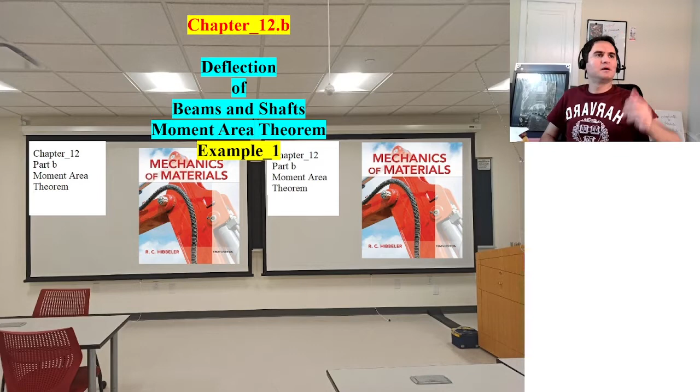Chapter 12, Part B: Deflection of beams and shafts based on moment area theorem. Example 1. In this example, we are going to solve the maximum deflection and also the theta at the free end.

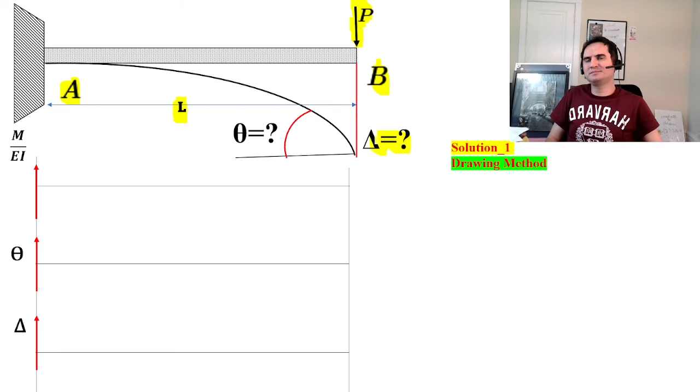So that's a cantilever beam AB with the length of L, handling a concentrated load of P at the free end. So we want to know what is the maximum deflection at B and what is the theta at B at the free end, because at A it is fixed, there is no delta, there is no theta.

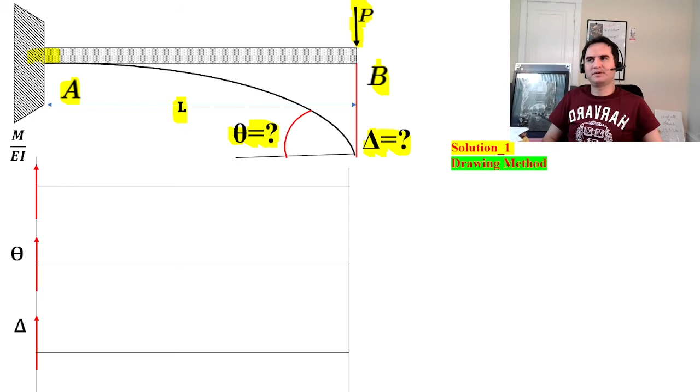So solution one, a drawing method. So if we draw the shear, moment, and M over EI, the area under M over EI is theta. If you remember, integration of M over EI is theta, and the area under theta is the delta. So let's see how that goes.

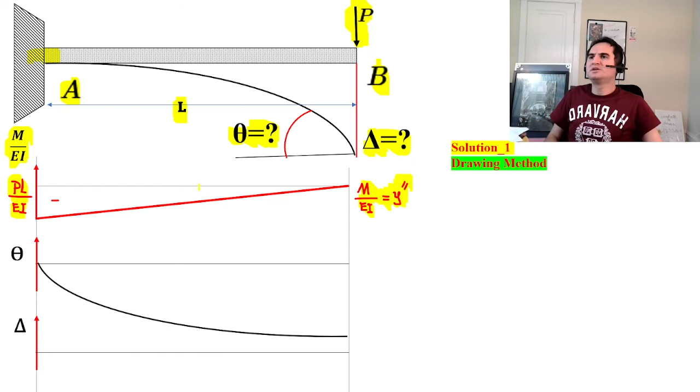So if this is our force, the moment area under M over EI would be y second, and that's PL over EI, because the moment created here is PL, divided by EI is PL over EI. And then from M over EI, if you calculate the area under M over EI, you will get the theta. So that's a second degree.

This is linear. So theta goes one degree higher than moment. So that's a second degree. And the area under M over EI, the area under this triangle, just gives us a numeric value for the theta. So that's nothing but PL over EI times L times 1 over 2 because of the triangle. So that's PL squared over 2EI. And that's Y prime or theta.

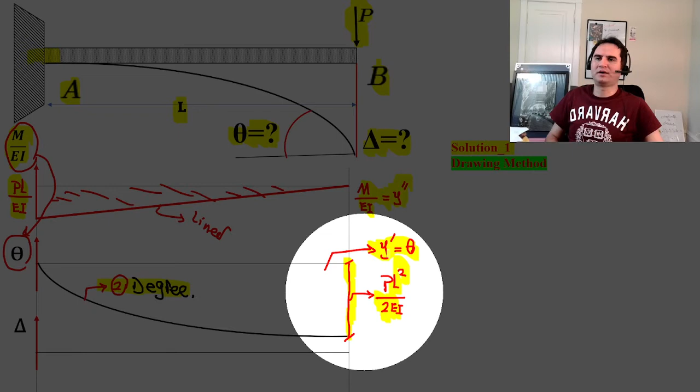And then if you go a step farther, this is second degree, delta goes one degree higher, and that's a third degree. And the area under theta is the amount of delta maximum at B. And if you remember, if we have a parabolic spandrel like this of second degree, that's 1/3 the area, B times H. So the rest of the area is 2/3 of BH.

And B is the length of the beam, and H is PL squared over 2EI. So that's 2/3 of L times PL squared over 2EI, and that's PL cubed. Yep. That's 2/3 of PL squared over 2EI times the length. So that's PL cubed over 3EI. So one can say the maximum deflection is PL cubed over 3EI, and theta is PL squared over 2EI.

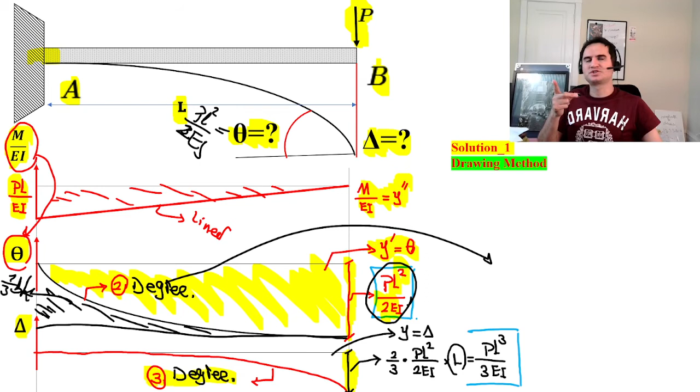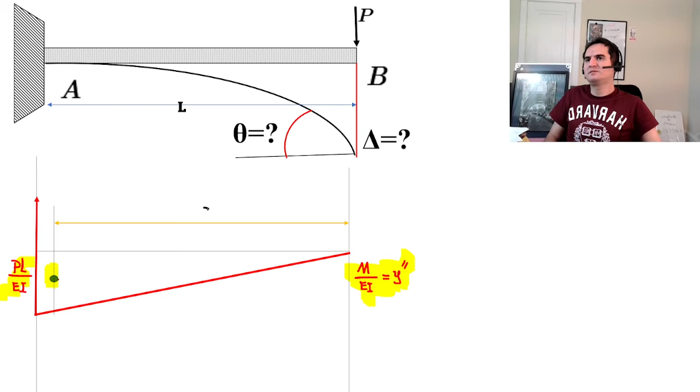Let's solve it with a different method. So that was from drawing shear and moment. We start from the moment, then draw the shear and go to theta and delta. At the same time, you can solve it by just drawing the moment and M over EI, and this time find the centroid. And again, if that's the centroid, that's 1/3 of L, and this is 2/3 of L.

Solution 2 is based on the moment area method. So one can easily say this is T of B with respect to A, the tangent of B with respect to A. If you draw a tangent from A, it gives you the tangent deviation of B with respect to A, and that's the area under moment about the vertical line of B. So that's the area times the centroid distance, 2/3 of L.

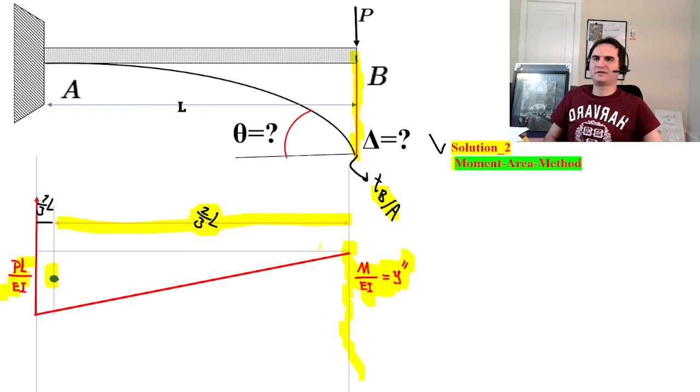So the tangent deviation of B with respect to A, if you draw a tangent from A which intercepts a vertical line from B, simply gives you the maximum deflection. So that's TB with respect to A, and that's half of PL over EI times L times 2/3 of L. If you do the math, it gives you the same value of PL cubed over 3EI. And theta of B is simply the area under M over EI, half of PL over EI times L. That's PL squared over 2EI, which we already have.

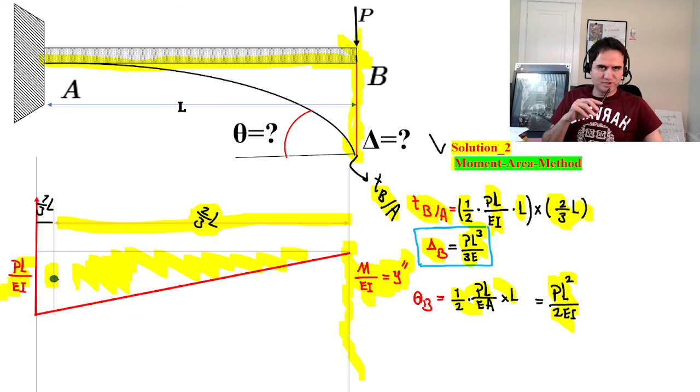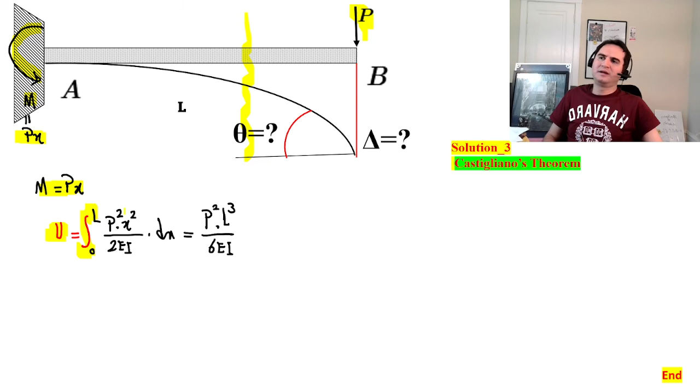You can also solve this problem with Castigliano's method, which is in chapter 14, energy method. If you calculate the moment, M is P times x, force times the length to a section somewhere here, and U is the integration from 0 to L of M squared, which is P squared times x squared over 2EI dx, and that gives you P squared L cubed over 6EI, and that's equal to half of P times delta B.

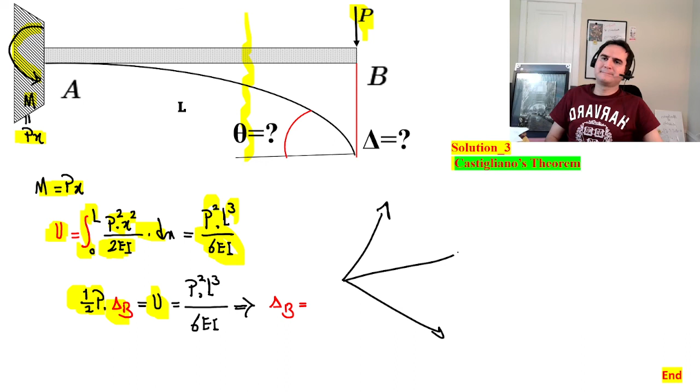That's half of P times delta B is equal to the energy. So in that sense, delta B is equal to PL cubed over 3EI. Those are three approaches you can use to solve a cantilever beam handling a concentrated load at the free end.

We will solve more examples.